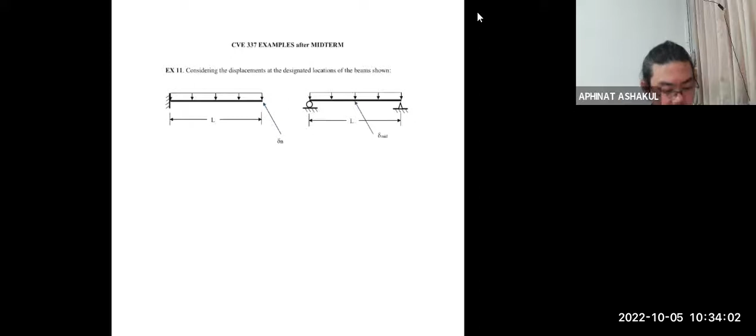I am trying to say that we need to have a system.

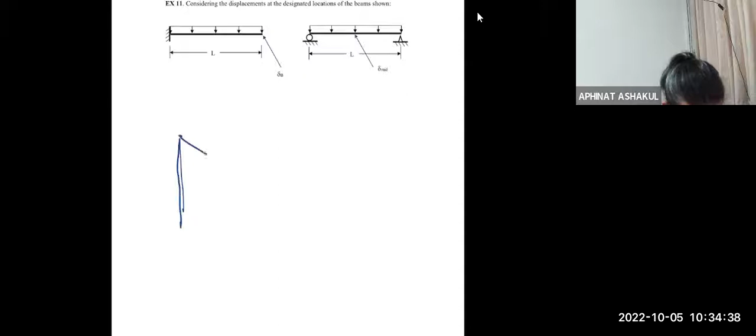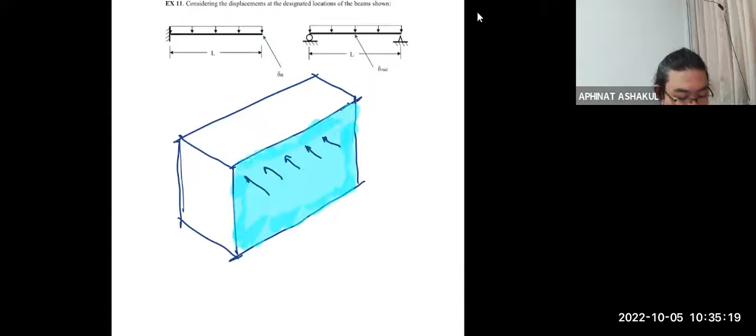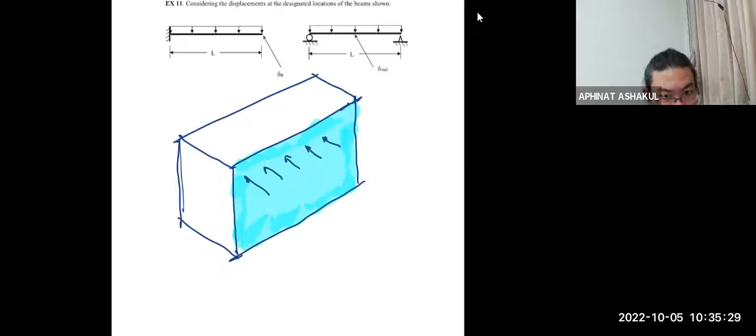Next one is ground shake, ground shake with the dots. As we have learned from sigma F equals M A, with the ground shake, there must be acceleration. Therefore, movement of the ground creates force that must be stand. And the beam system that stop not take care of it. That is why we need the lateral system.

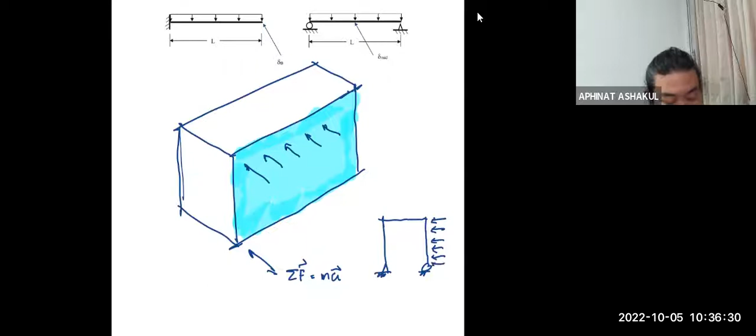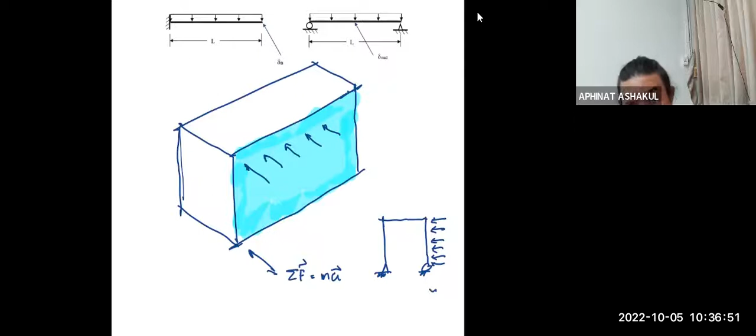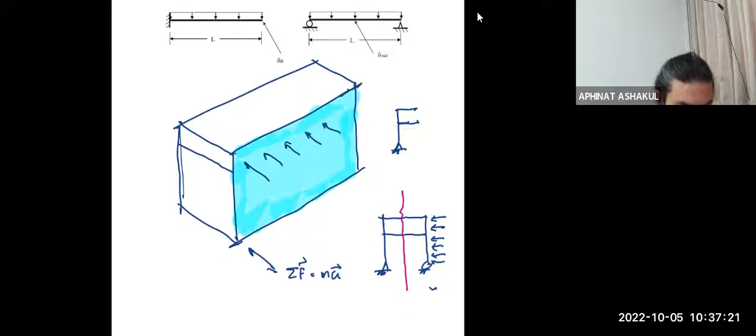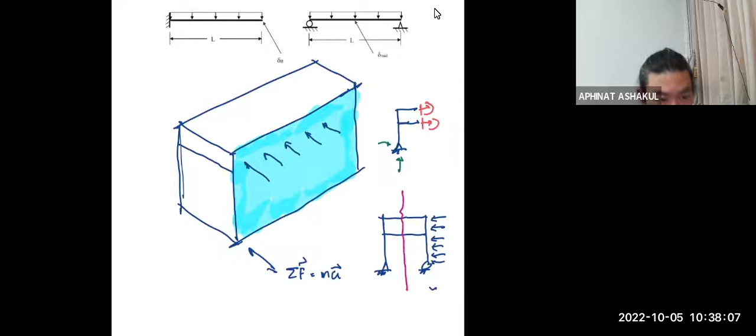You see, here you have shear, axial, and then you have two members. You have shear, axial. How many of those we have after we go react? Now we have 6. 6 unknowns, but you only have 3. So this structure by angle over here, you have what we call indeterminate structure.

Now, static indeterminate structure, meaning you cannot use static solve. And in reality, we're going to have more. We're going to have more of this. We're going to have more. So it's urgent and important.

Imperative means urgent and important. It's not only important, it's also urgent. It's imperative, okay? So it's imperative we know how to solve the structure that has more unknown than.

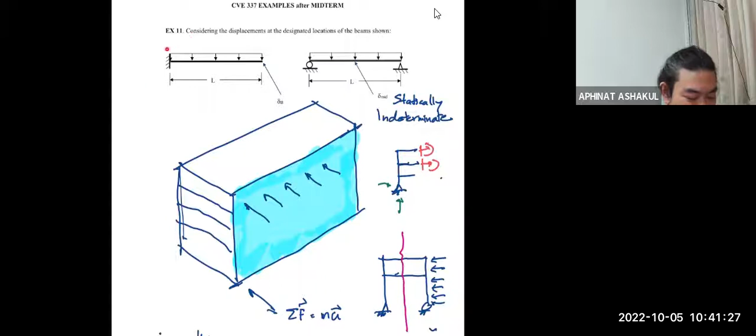Okay, so it's about trying to understand what this animal is about. This animal is called statically indeterminate structure. Okay, so let us go back here. Let's say if I have this typical structure. Okay, now this is determinate, right? So I can say, yeah, it's a determinate structure.

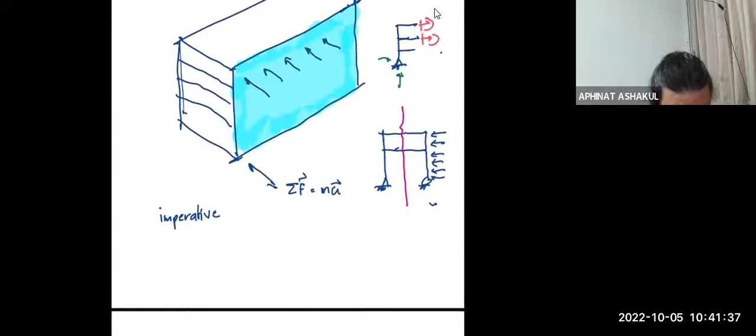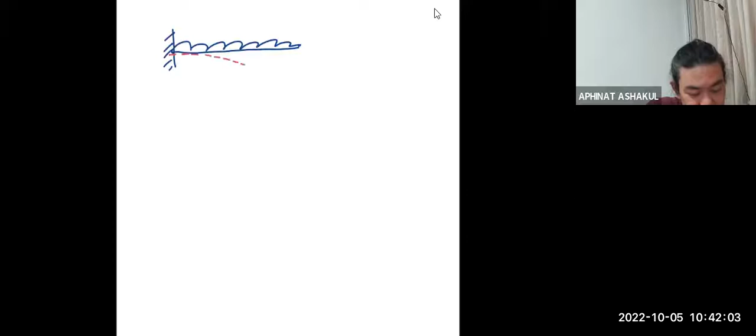It's supposed to be blank. And from that, okay, I will write down a simple cantilever beam with that. Okay, so let's say if this beam has so much deflection at the end, okay, without anything, without any modification, we know that this beam will deflect down like this. Is that correct? This is your typical understanding.

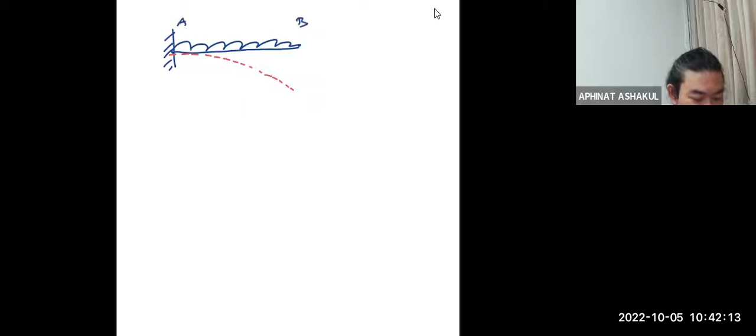So let's call this A and B. So here it becomes say delta B. Okay, the displacement or deflection at B due to your load.

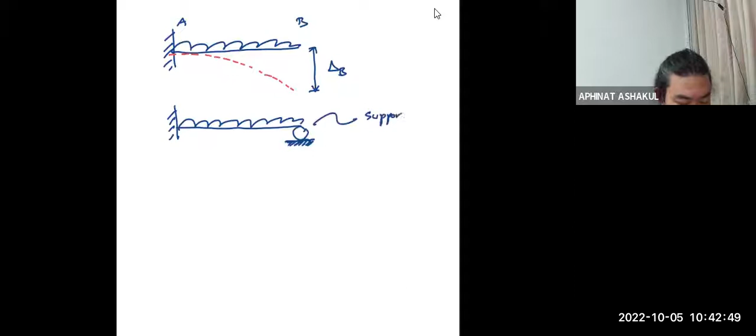So what if I say same beam, but I put the support there? The common understanding is that you know that this support eliminates

delta B, correct? It's common sense. If you have a support, the definition of the support from your good old statics would say that, okay, right there, that should not be any movement. So if I put the support at level, with A at B, okay, if I put the support at B in the same level at A, we can simply say that we don't have delta B.

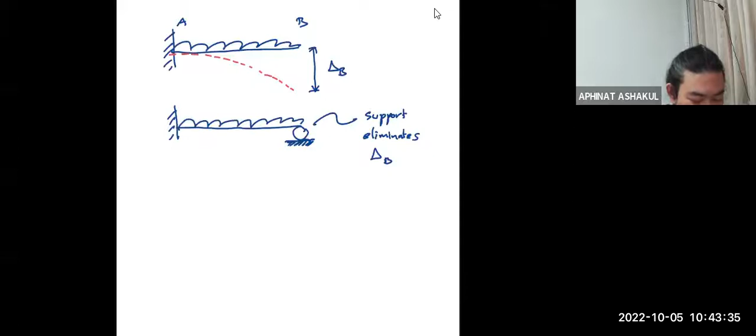This is a very common thing, right? Okay, we don't have delta B because we have the support. So if I replace the support, okay, this is now a typical cantilever beam. A very typical cantilever beam.

Now, let's say with no support, I say there is a force there. This force is unknown. Now, suppose I don't want to know... I'm trying to find the best way to explain this. Let's say I want to know this force. I don't know how much it is yet, but I want this force to give me the displacement here.

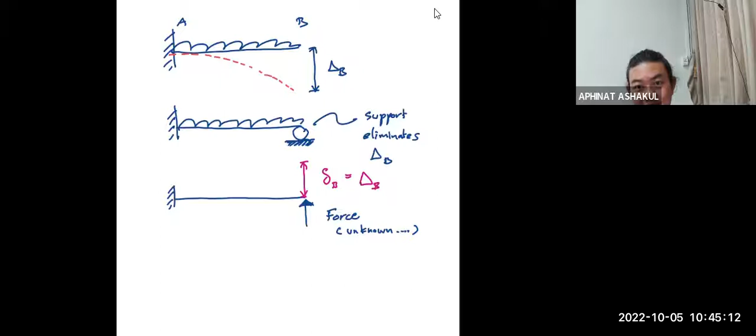Let's say small delta B. If I set this delta B equal to the capital delta B, now instead of trying to calculate the displacement because you know the force, that's what you've been doing all along, right? Now, instead of giving you the force, or instead of knowing the force, I know the displacement. And I want to calculate the force that gives me the displacement that I know. Can I do that?

Maybe I'll write down. Every year that I begin this stuff is different. So you are more than welcome to go back and look at the video clip from last year, see what approach I used. I think it gets different every year, and the nature of people is that some learn better by method A, some learn better by method B. You never know. I just have to try to give them as many perspectives or angles as possible, if they're okay with one.

So let's say before, I'm gonna write this down this year. Before: force is given, displacement is obtained. Kind of a nice word. Now, displacement is given.

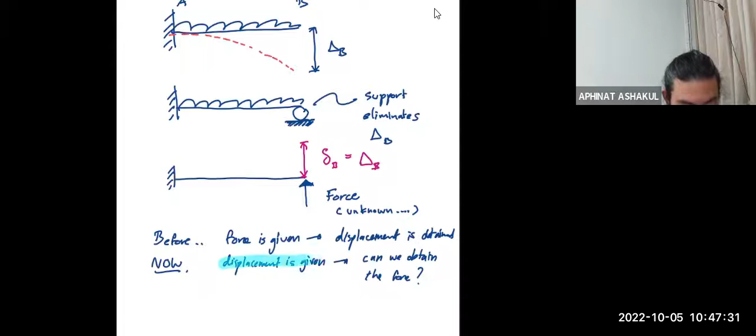Now displacement is given, can we obtain the force. So let's say yes, because we don't have this one. So I'd say yes. Once we obtain the force, that will give us the same displacement. Which means if I combine these two cases together, like this, combine the two.

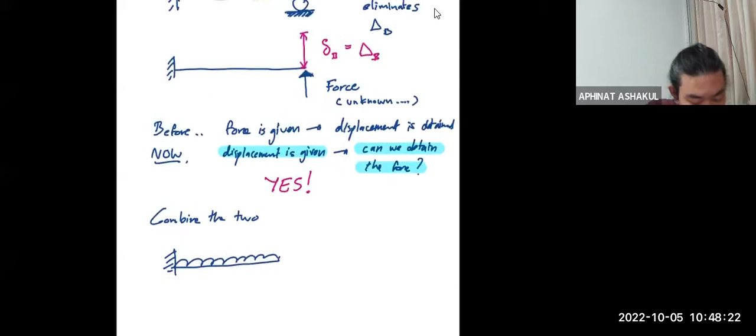The first case is the cantilever beam with the load that gives you capital delta B. This is what we call displacement due to actual load. The second case is force. It's called P.

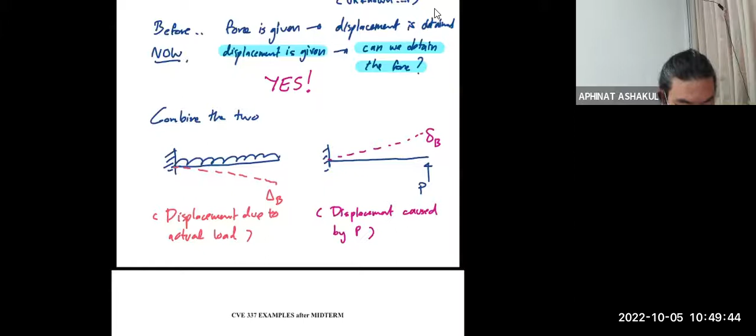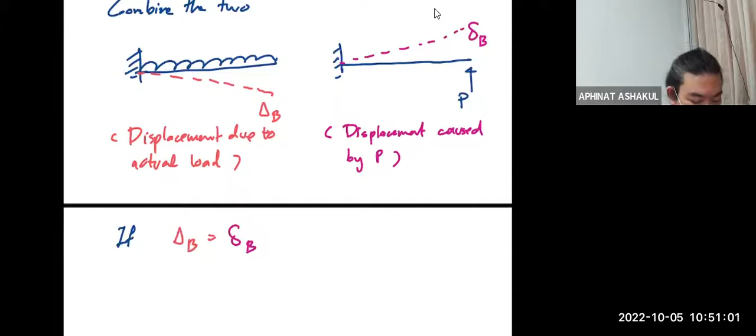So I'm supposed to... well, it's now just up. Can I move it? Yeah. Okay. So now let's say if delta B is equal to this small delta B, or you can say delta B plus small delta B equal to 0.

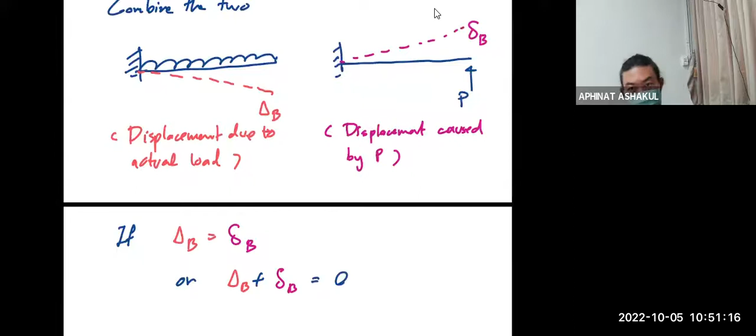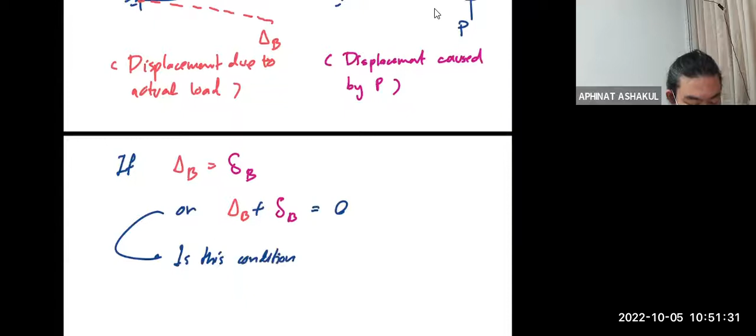What does it give you when the combination of displacement becomes 0? Doesn't that mean the support? Is this the condition of the support? Yeah. So meaning if I redraw, this is where you have this condition.

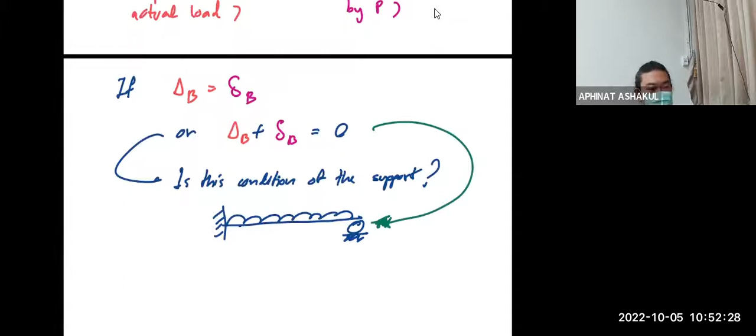You have the displacement caused by the load, the actual load. And then you have the displacement caused by the load P, knowing that this P will create the same amount of displacement. When you combine them, you would have the condition we call the support, right? Because now the displacement due to the load and the displacement due to this force happen to be equal and opposite. So when you add them up, you have 0 displacement there. And when we have 0 displacement at one place, can we call that place a support? Of course we can.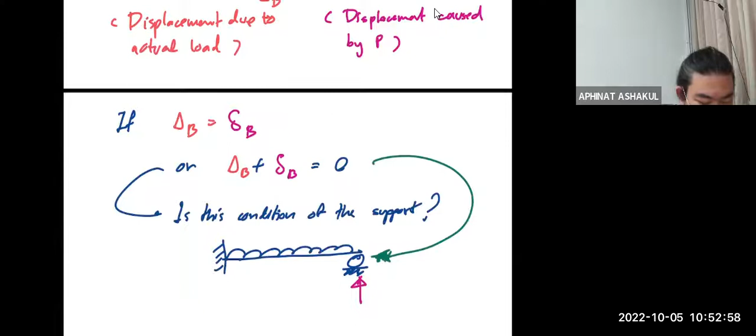All right. This is something that we call compatibility.

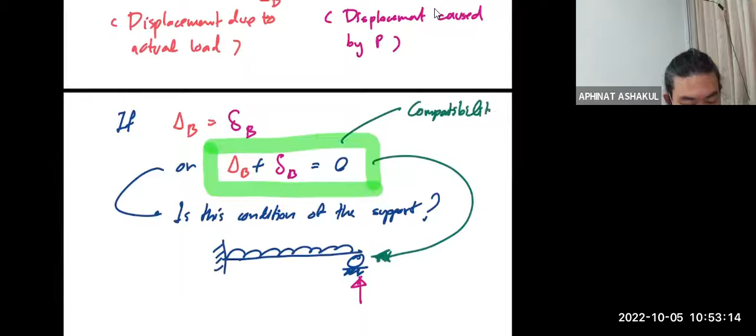Okay, so everything has to be compatible. The displacement due to the external load must be equal and opposite to the displacement caused by P.

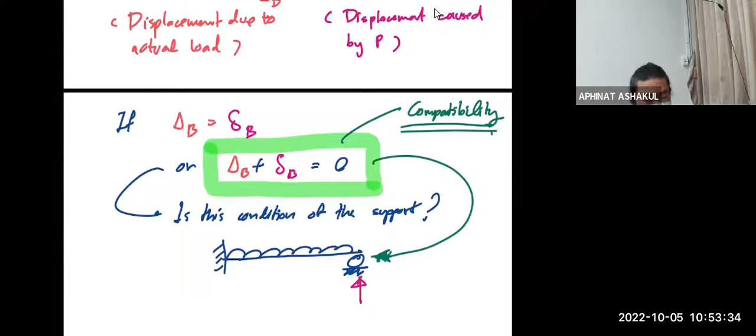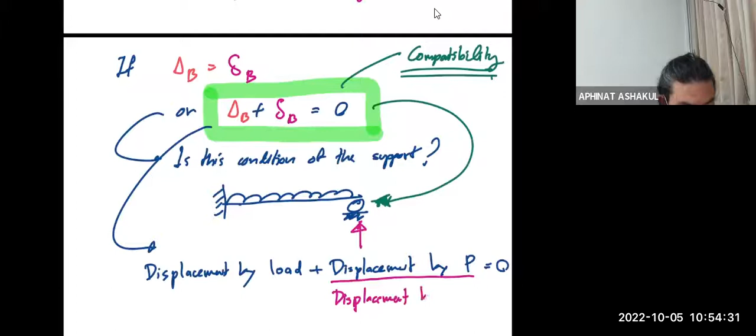This is the compatibility condition. Now instead of keep calling it displacement by P, I can say this is displacement by the reaction RB. Can I say that? Of course I can. Meaning, if you are capable of calculating the displacement caused by the actual load, you should be able to use that information to obtain the magnitude of the reaction that will produce that same amount of displacement, but in the opposite direction. That is the concept.

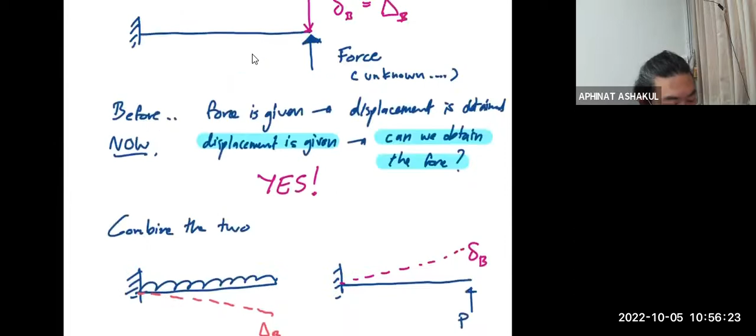Folks at home, are you okay? Any question? No question.

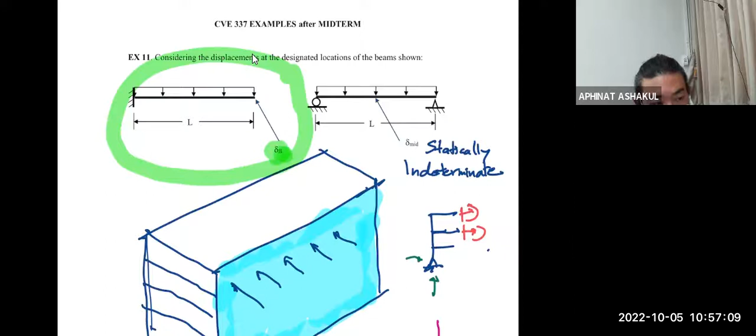So you see, the difference is that in this picture I should use the capital delta. When you look at this picture itself, it begins from what looks like a determinate structure, and we talk about the displacement here, right? So if you can understand that it's a typical determinate structure and you have this kind of displacement, we can just find a force to stop this displacement, to eliminate this, to make it become zero.

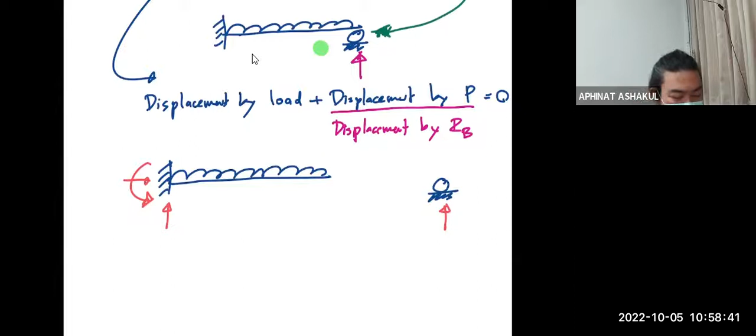So from an indeterminate structure, a reaction can be removed.

So the consequences are, first of all, we will have deflection. With the support there, you don't have the displacement or deflection. Now I call it deflection. Let's say the displacement, okay, so that we keep consistent.

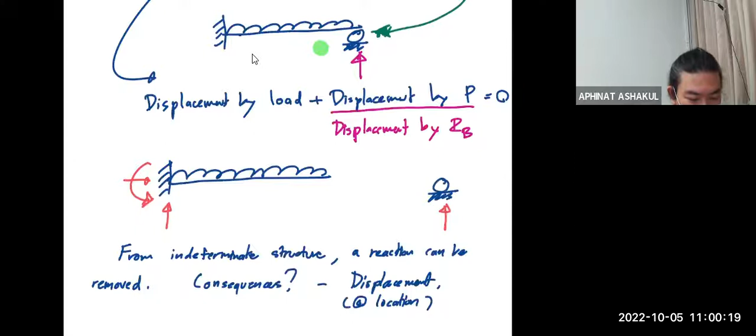Displacement. But keep in mind, when we talk about displacement, if we talk about displacement at that location, we don't talk about displacement anywhere else. It has to be at that location. Because of that, now you have delta B.

Now you see, keep in mind that our real structure is this cantilever beam with a roller. Now I just remove the roller out, so I have the displacement, and this structure with one reaction removed.

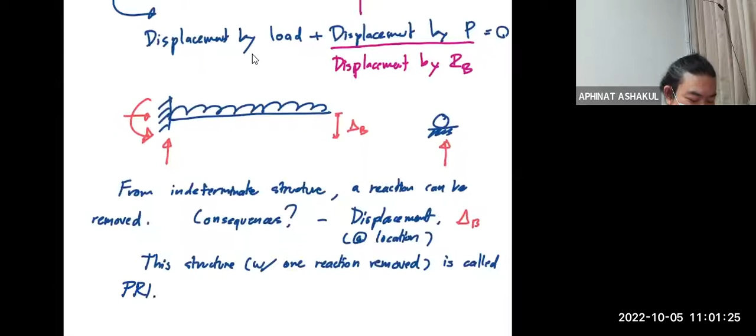Yeah, it's called, wait for it, it's called primary structure. Like a prime number.

Okay, so that's a consequence. We remove one reaction, and we sort of induce the deflection or displacement because the support is no longer there. We just take it out, and therefore you cannot say the displacement at the location where the support used to be will be zero anymore. It will be there.

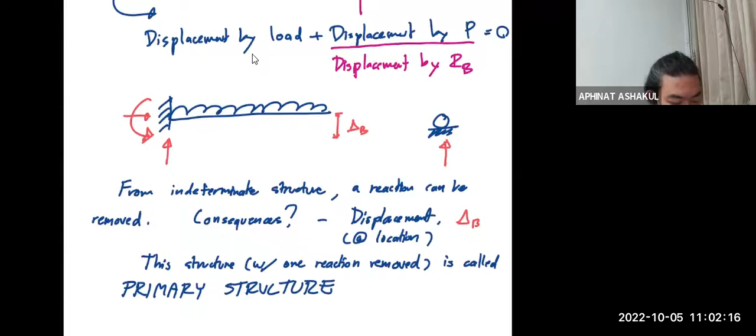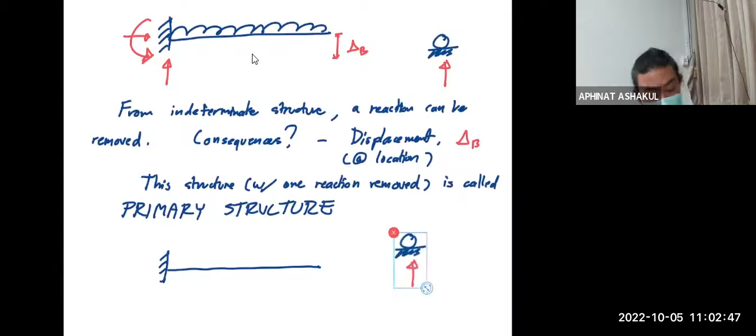Okay, so now the same structure, I put this back on. I think it's pretty hard to copy the drawing like this, but let me see if I could do it. I'm still persistent. Oh, do it this way. Okay, if I put this back on, now, without giving the roller back, because we can replace the roller by the force this time. So put this back on. It's equivalent to having this here, right? Because if you draw a roller, how would we have it, we can't. So you can say just put this back on, but just the force.

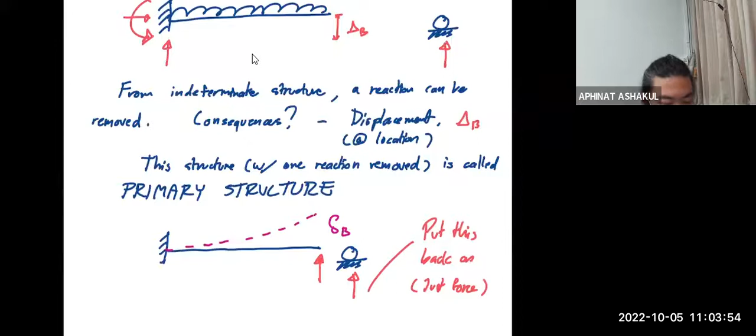You know that this force, whatever it is, will have to give you delta B. And now you know, because it is a force from the support, this delta B will have to be equal and opposite to the capital delta B. I'm trying my very best to be literate. This delta B, not very nice, being the displacement caused by the reaction, must satisfy the compatibility condition or equation, whatever you want to call it.

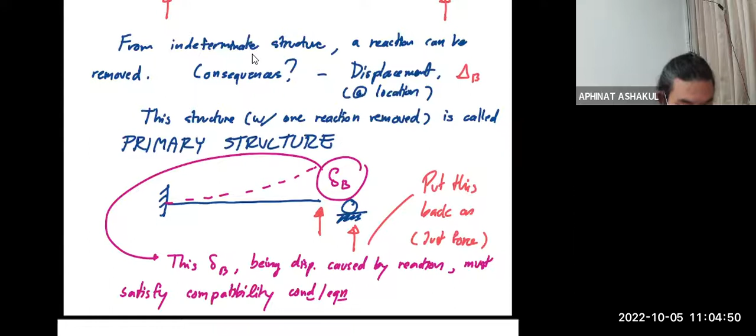That's the condition, or equation, in short, which is of course delta B plus delta B equal to 0. It has to be because it's a support. That's why we say it has to be compatible.

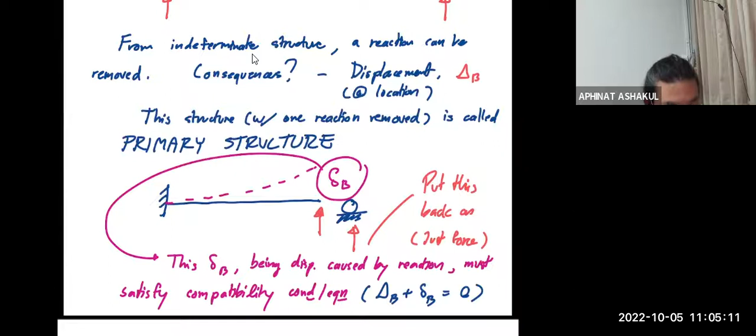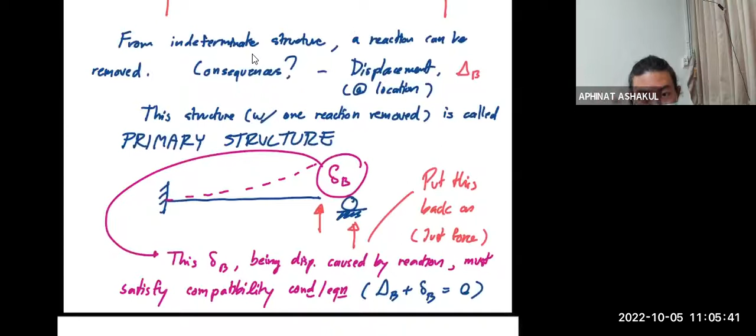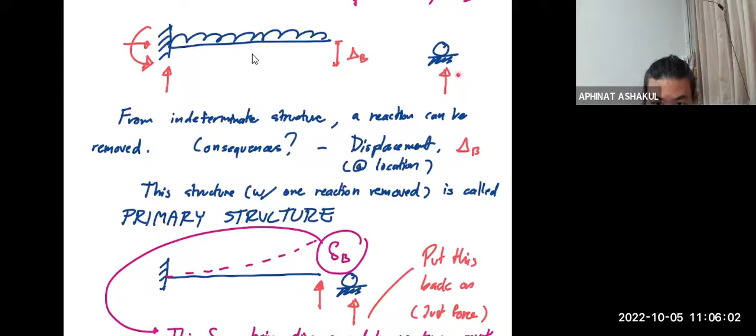Can you see? Can you appreciate the differences? This is the actual displacement caused by the load. It's there because we remove the support. This is the displacement caused by the support reaction trying to push this back to 0, or we can say trying to obtain compatibility.

So generally, the first one here, the capital delta B, can be obtained because you know the load, and we have created the determinate structure by removing the reaction. This is what we call primary structure. So you can always obtain this one because we make sure that we remove the reaction so that we have the primary structure that we can calculate displacement. So delta B can always be obtained.

And once you know this, small delta B is a function of the reaction RB, meaning you now can solve for RB.

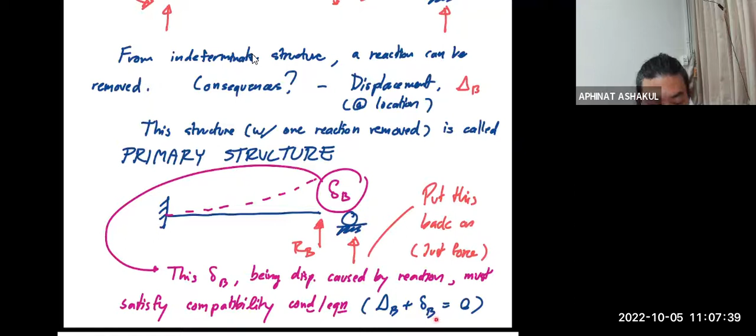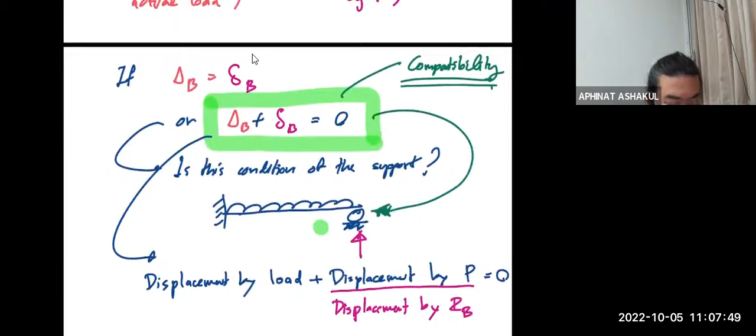You can see that if I go back to this structure, which is what we are doing here now, if I put delta B out and I put this back on, now you have the structure with four reactions, correct? And the number of unknowns exceeds your equilibrium equations by 1. So we call this structure 1 degree of redundancy.

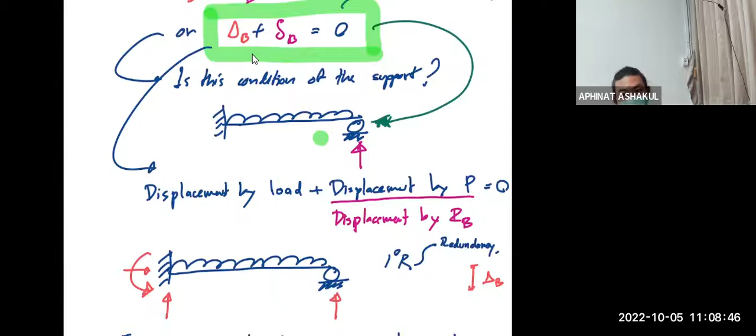R is for redundancy. Now, redundant is something that you don't need, right? If somebody tells you, hey, in the group project you are redundant, you're not supposed to feel good about it, because it means they drag you along, you don't help anyone in the group at all. So in this sense, a redundant is the reaction that we don't actually need. Your system can survive without it. But yet we want redundant because, first of all, your structure will become stronger.

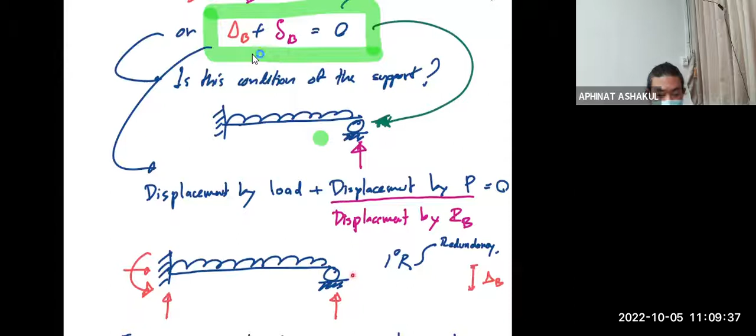But this structure, for example, look at this. This structure is much stronger than just a typical cantilever beam, because there is another support to help reduce the displacement at the end. So the structure is stronger. When the structure becomes stronger, it means that your internal force will be less. And therefore, when the internal forces become less, your member will be smaller. And the fact that you have the redundant, something beyond your need, means that it will give you extra safety. Because if you have a determinate structure and something goes bad, your structure is so ready to collapse. With extra redundant, you will have some reserve somewhere.

Okay, so in the real world, we usually prefer the indeterminate structure, not the determinate one. Nobody builds the determinate structure. You will not just go out there and see high-rise buildings completely consisting of determinate structures. Impossible, because it would mean you would build a truss to withstand the wind load and the earthquake. It's untenable. So this is real, and this is your first foray. Again, trying to use crazy vocabulary, but foray is a word. This is your first journey into the real world.

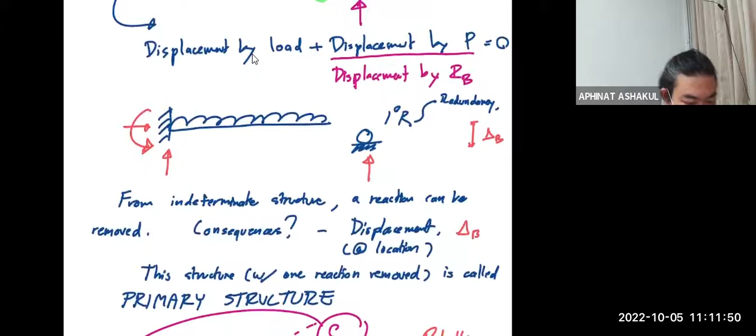We remove the redundant. Instead of saying your reaction is remove, one reaction is remove. Typically, people would say we remove redundant.

Now keep in mind, be mindful of the word. We can remove it because it's a redundant. If it's not, you cannot remove it. Okay, let's say you have a simple beam, you cannot remove the reaction because you don't have the redundant.

But now you have the indeterminate structure. You have the redundant, unnecessary reactions. You can remove them on one condition. That is...

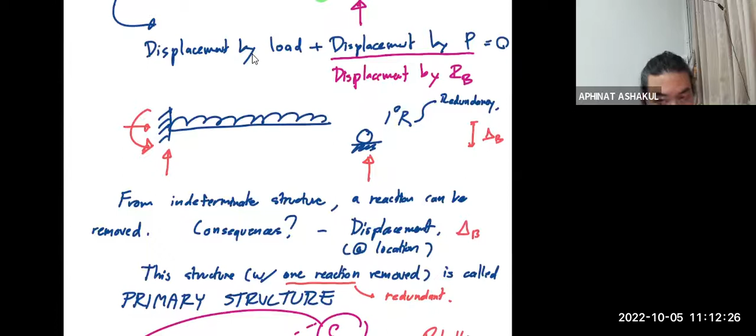Remove, and here, your structure must remain safe. And we remove it so that we have the primary structure, the one that you can take care of.

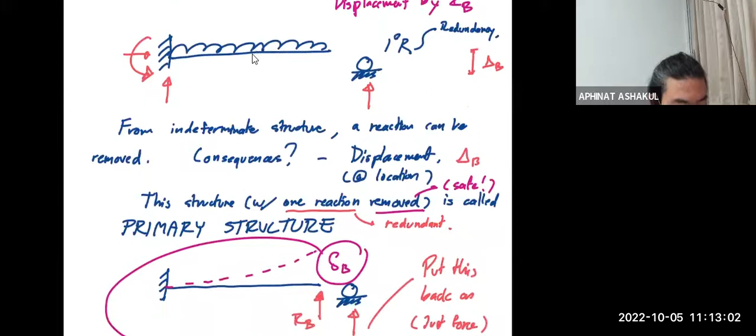Once you remove this, it means that you can have the displacement that should be equal and opposite to the displacement produced by the reaction itself. And that condition is called compatibility.

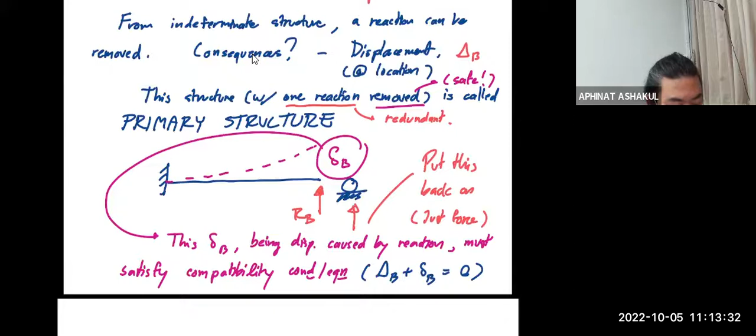So now, is there any question? Go quiet again. So now, let's say we have 5 minutes left. I don't really want to start a new problem, but because it's been so quiet, so I don't have a choice. Okay, let's look at it.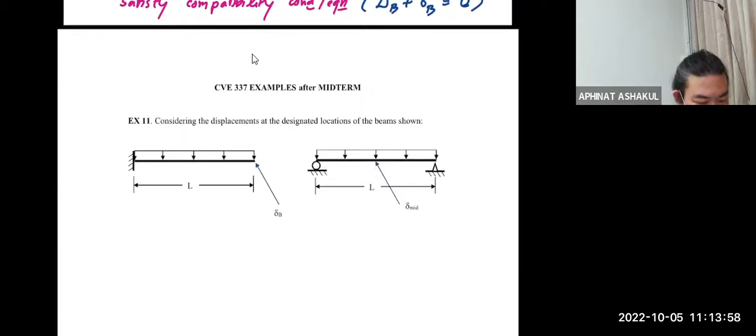It's a simple beam, and we are trying to take a look at midspan. Again, if it's a simple beam, and we focus at midspan, do we have the delta B at midspan?

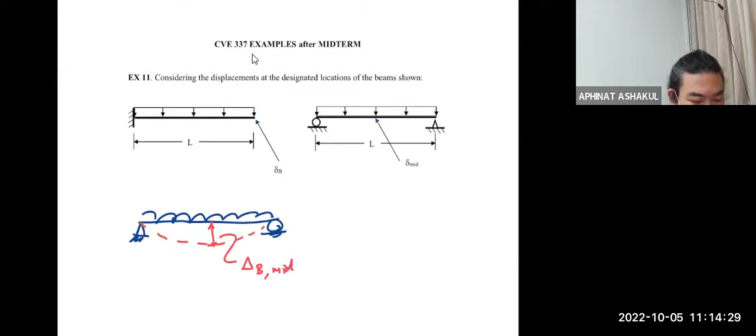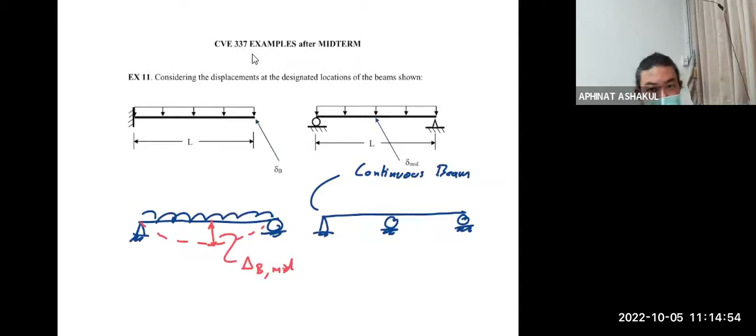But if again you don't really see simple beam anywhere, let's say instead of having a simple beam, now you have a beam with another support. Now this looks more typical because it's what we call a continuous beam. It's a beam with more than one span constructed continuously.

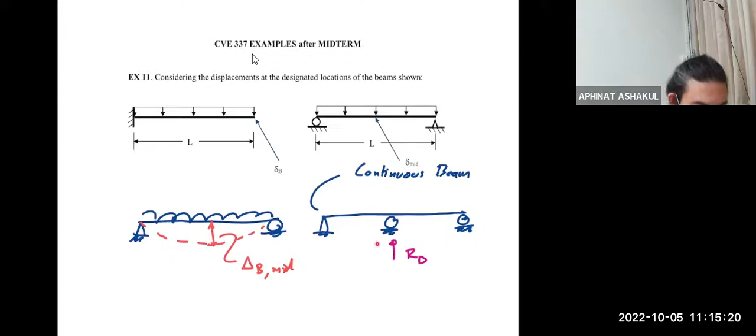So, meaning if I hold this B again, this RB is there to eliminate delta B. That's the support, right? If you have the support here, you will not have delta B.

So in the same fashion, this RB should give you delta B that is equal to capital delta B.

Keep in mind, because I think some of you are not really mindful, when I write the first condition here, it is the condition with the actual external load. This is the condition with the reaction. So be mindful of what condition you are going to calculate the displacement, because there have been some students who mix them up, and it's been there are quite a few of that every year, and I bet there's going to be a few of that this year as well, especially those who are not in the class.

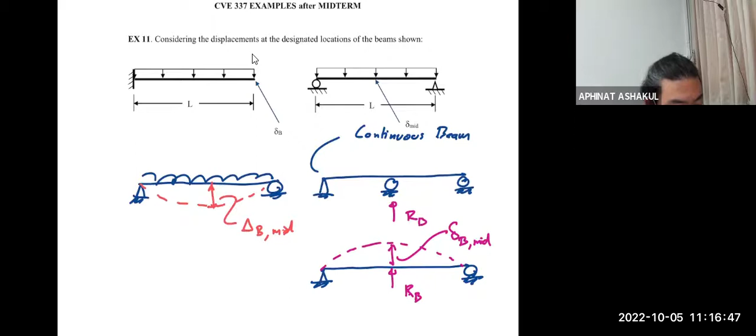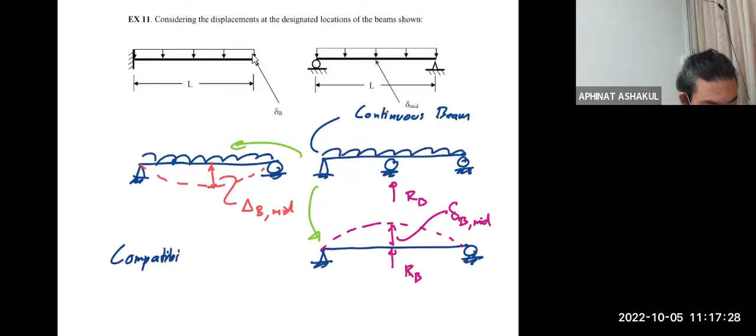So again, if we have the real condition that looks like this, it comes from these two, this and that. And again, the compatibility equation would be delta B plus delta B equal to 0.

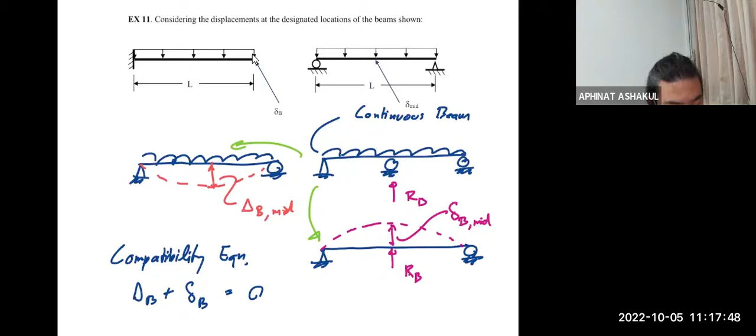And this is your primary structure. Okay, so you've come this far. I believe the first thing that you need to be able to do is to calculate displacement.

You can recall that? And I believe if you have come from a previous chapter, you have learned the virtual work as well, right? Am I right? Have you? The virtual work? If nobody says anything to me, I will assume that you've learned it before, and I'm not gonna spend a lot of time doing it. How about that?

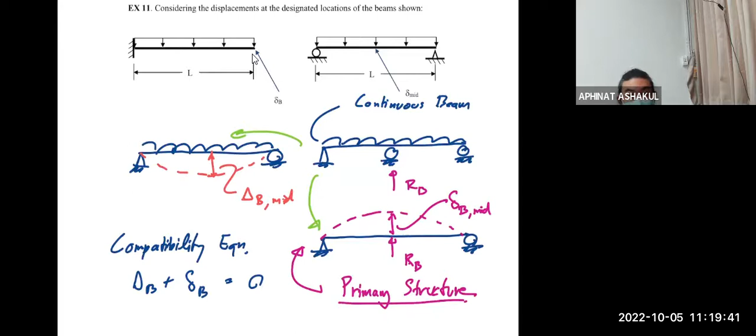One thing about the virtual work is that it's been there for more than 300 years. I'm not kidding. That means they could do it without calculator, computer, air condition, elevator, escalator, cars, TVs, mobile phones, etc., etc., etc. And you have all kinds of technology in the world supposed to be able to do it, right? The virtual work by the great Bernoulli. The Bernoulli family, the family that has given you all help. The Bernoulli equation, the virtual work, and many more. It's the entire family. There wasn't one Bernoulli, there's just many of them.